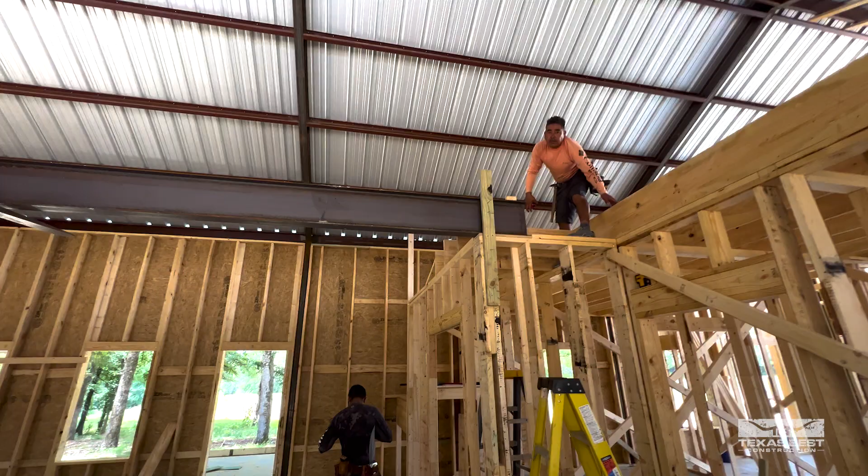All right, guys, there we go. We got it in place, and this is going to be just a structural support that we're using for our floor joist here.

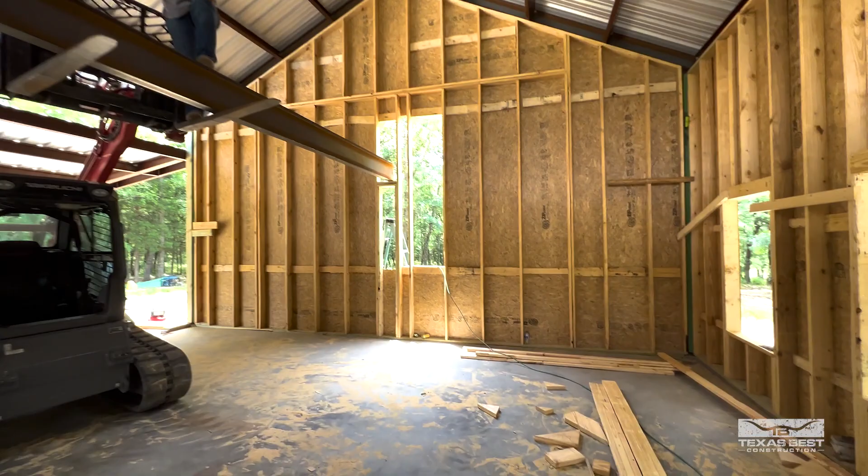Normally we don't have to do all this wood framing, but seeing as we were making a floor joist here, we have to have the structural support vertical, because normally for a metal structure it's just horizontal structure.

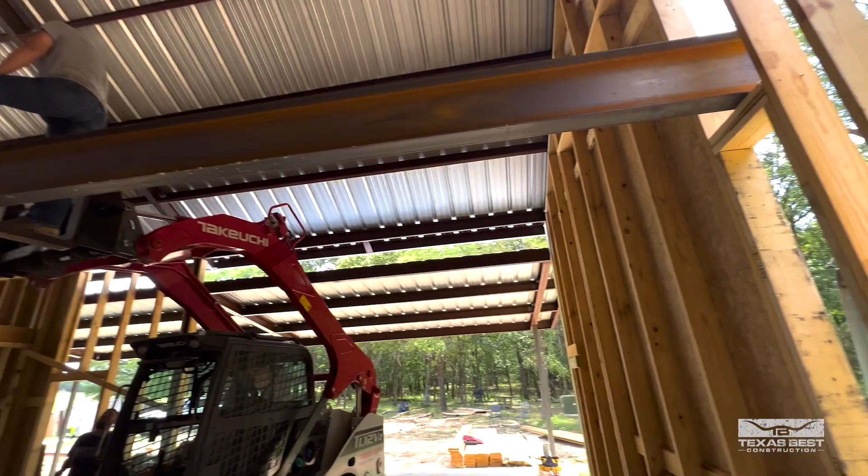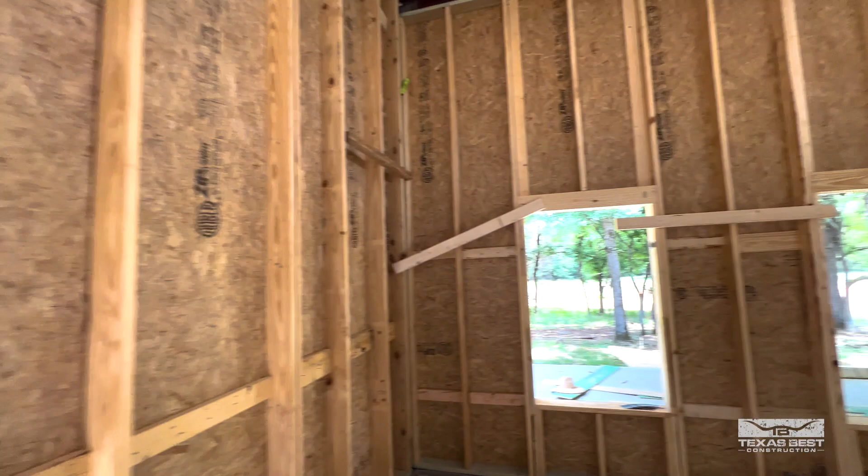We could have done a lot of this with steel, but since you're creating some covered space up here, we had the zip system and windows in here, so it made sense to go ahead and use our wall system that we normally use, since we're going to have a floor joist running across here, and this will be the main support that runs across this space.

This is why it takes more to create a lower ceiling in a vaulted area, because usually we would just use that open structure up there, but when you have to have support, you have to create that support.

So we built stud packs on each side. This is not done yet, but this is just temporary. I'll show you guys that here in just a bit.

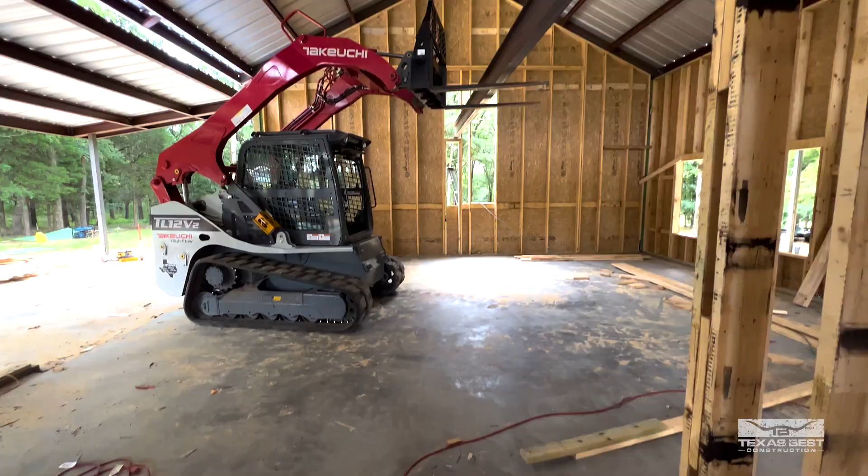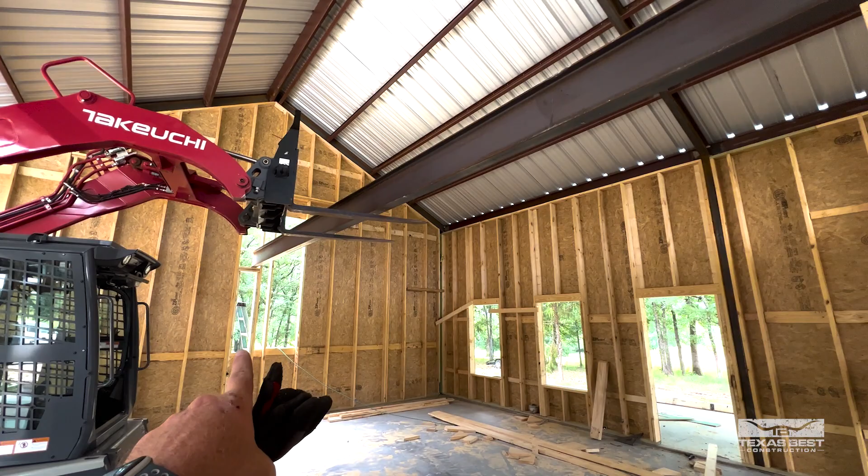All right, so this is the open area. This is where we're running this I-beam here. And there's a stud pack on this wall, one on this wall.

So this is going to support our joist system here, giving them much more storage up on the top. Essentially the customer was trying to utilize as much space as they could, being that we had to have 9-foot ceilings here in the garage to give them a little bit more headroom, as well as in the living space.

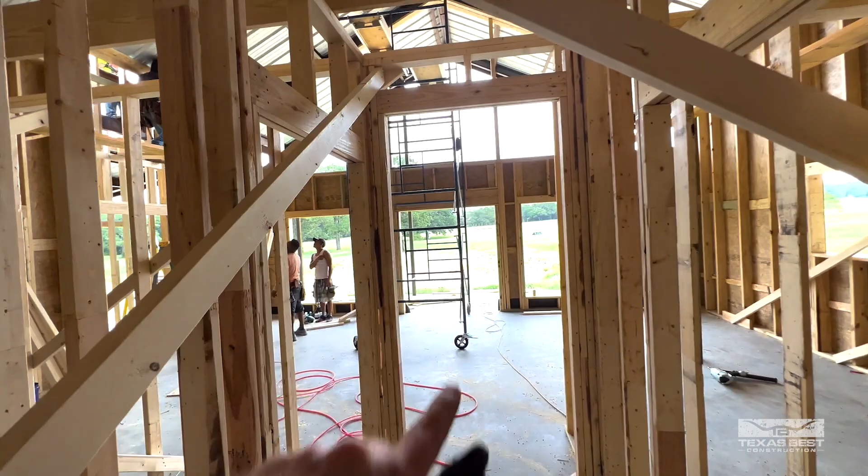They've got a little lofted area that's going to be up here that overlooks this living area. Pretty cool space.

But sometimes these compact areas actually have a little more versatility about them, because you're trying to pack a lot into a certain amount of space. Here, having the wraparound porches going from one side all the way around to the other, I think is a pretty cool feature on this build.

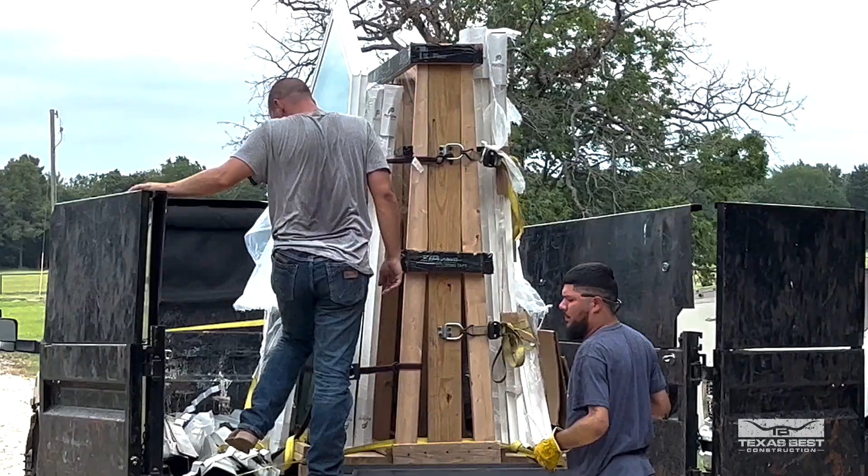Got Senor Brandon here with Aaron. These guys are delivering windows today. A lot going on here on this build.

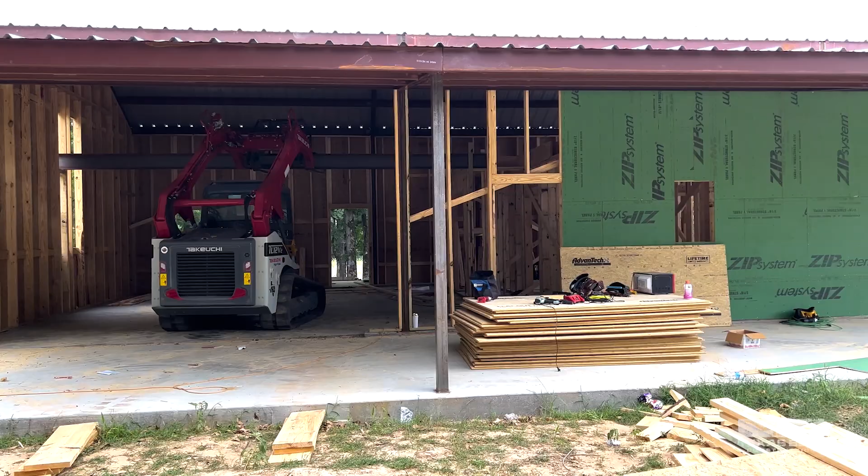Got my oldest here with us today, Mr. Jensen. It's summertime, so he's out of school right now. The guy's over here taking a break, working hard.

So we've got some different shaped windows that we're delivering here on this. It's going to have it off the front gable, which is pretty cool.

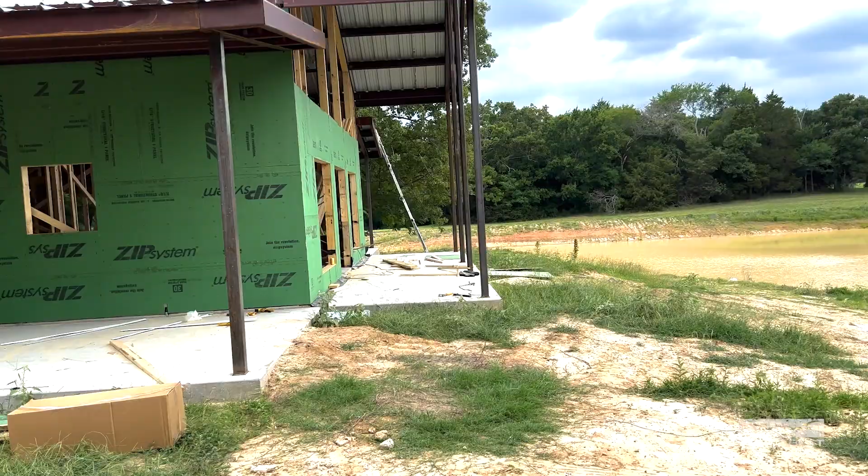I'll try to get you guys a shot of the elevation view, but you can imagine we're going to have windows similar to the look of our Sadler barndominium. This kind of gives us that monitor style feel to it.

But I think it's pretty cool, and it's going to sit out here and look out over this water.

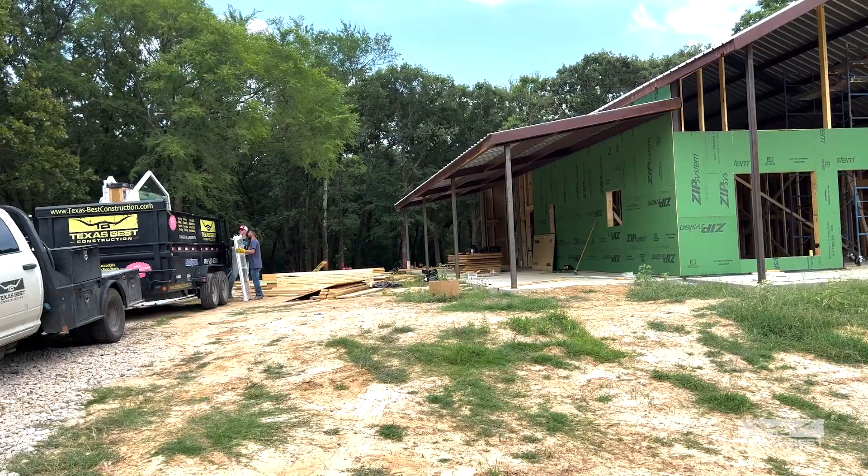Initially, when I met with the clients, we were actually going to put the house somewhere right over there between those big trees, which would have been cool just as well. But this just had this prominent spot back here. Felt like we needed to get that in there.

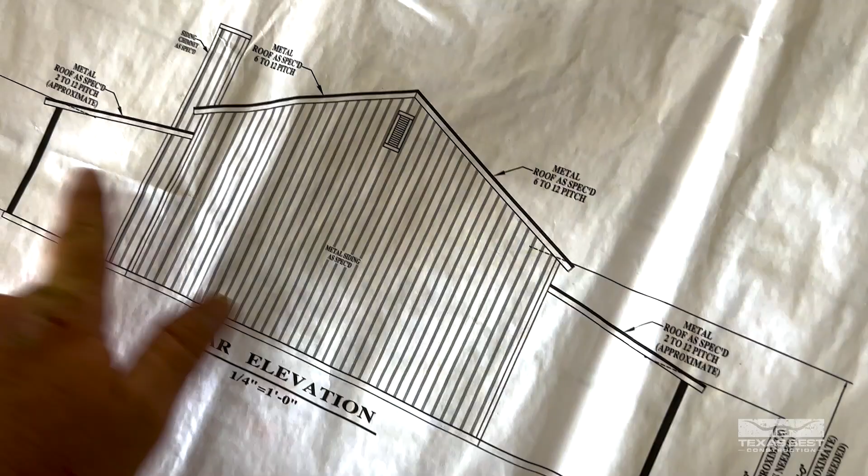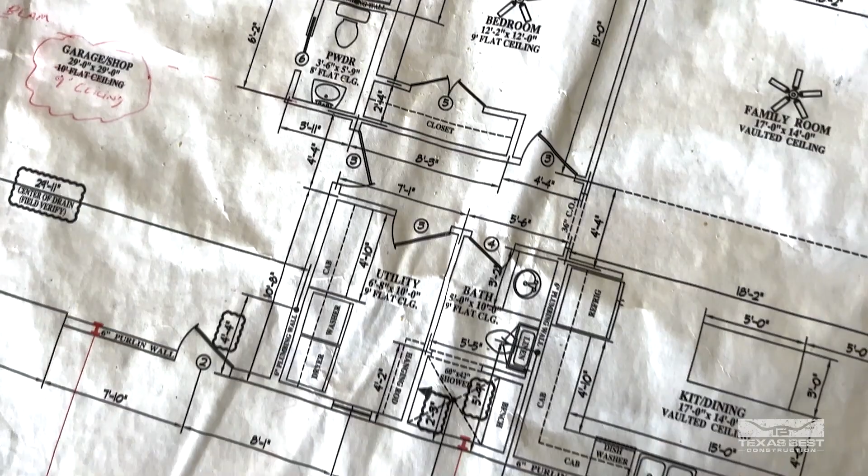And then here is the floor plan downstairs, which has that kitchen off that main entryway. We've got our vault coming in here, fireplace over there, family room. And then a modest bedroom downstairs, 12-2 by 12 with 9-foot ceilings.

Good little closet there, utility room, guest bathroom, as well as full shower over here. Basically, this is kind of like your whole master suite setup.

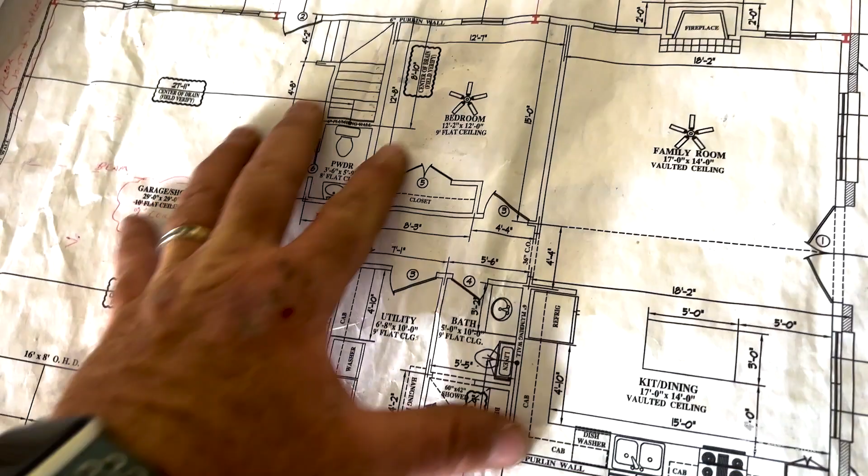And then down here, we got a powder bath and a big shop here, which is approximately 30 by 30, which is good size. It's kind of equal to our red oak barndominium.

And then up on the top side, we got on the top, this is where our stairs come up. And this is what we were already planning to do, is to have kind of an open railing here looking over below.

Bathroom. We are going to have to shift this bathroom over a little bit due to the ceiling height, but a couple feet, 2 or 3 feet, we're going to move that whole thing over.

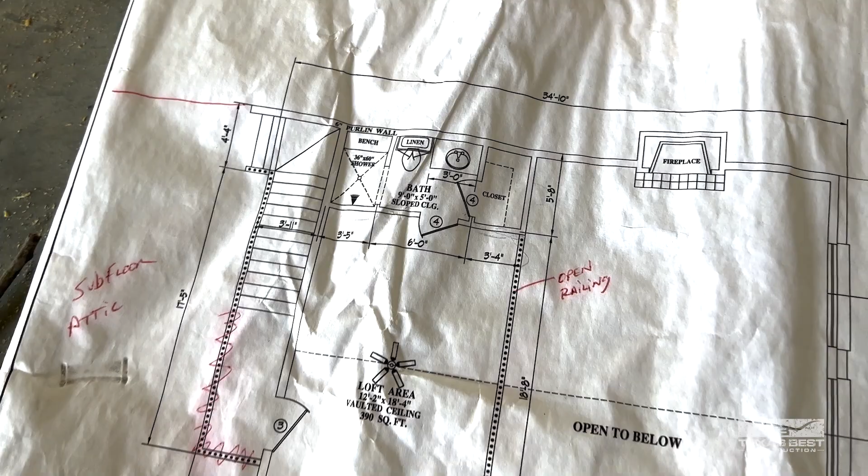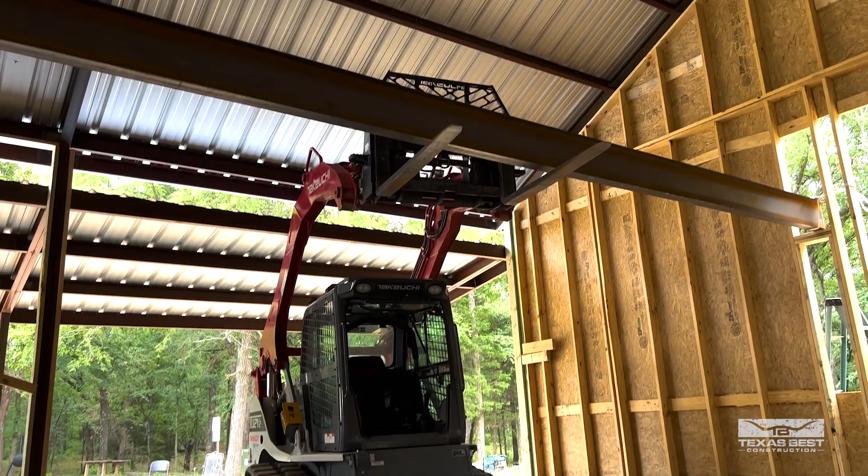And then we've got a mechanical room on this side, and then all this was added over the garage, an additional storage, which is what we got over here. So that's kind of a big part of what we modified on this plan.

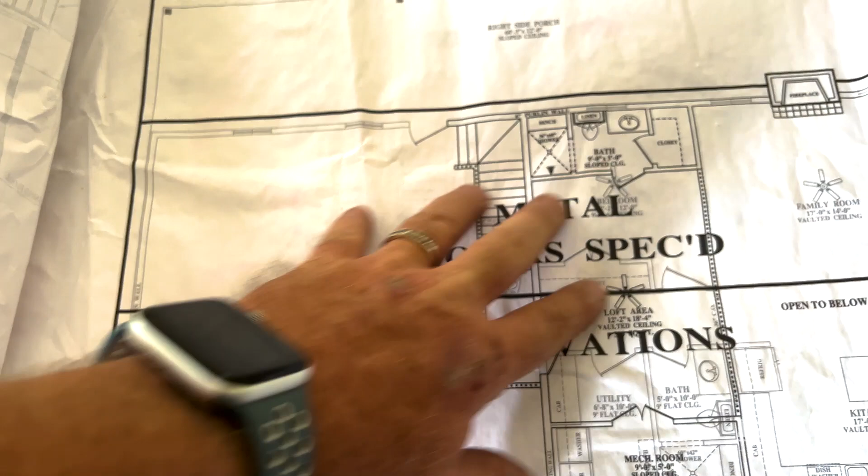Originally, we weren't going to have this space part of the floor system from the top. So they ended up changing this before we got to the framing stage.

All right, guys, so we're going to continue making progress here on this build. I hope you're enjoying seeing some of our East Texas work. And we will have a lot more coming on some of the finished tour barndominium builds that we're doing.